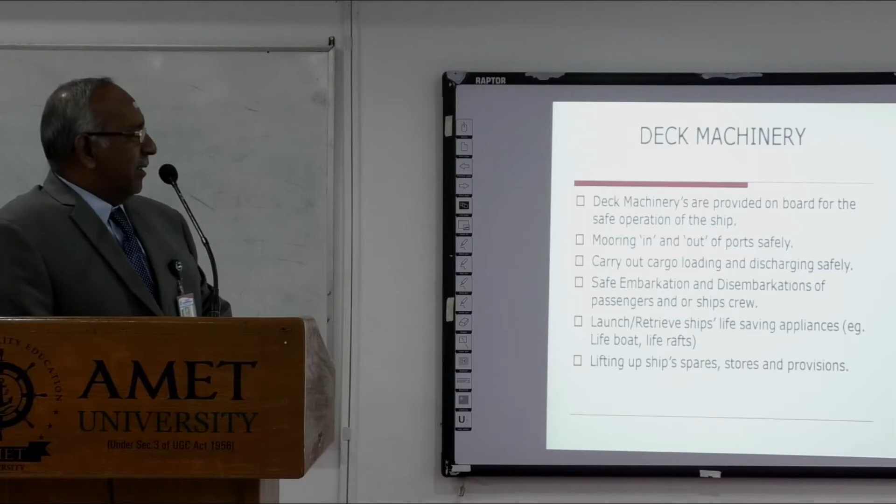Now, today we're going to discuss the deck machinery on the ship. Deck machinery is provided on the ship for the safe operation of the ship. Therefore, there are various machineries. Mooring in and mooring out of ports safely is accomplished with that, carrying out cargo loading and discharging safely, and safe embarkation and disembarkation of passengers and ship's crew.

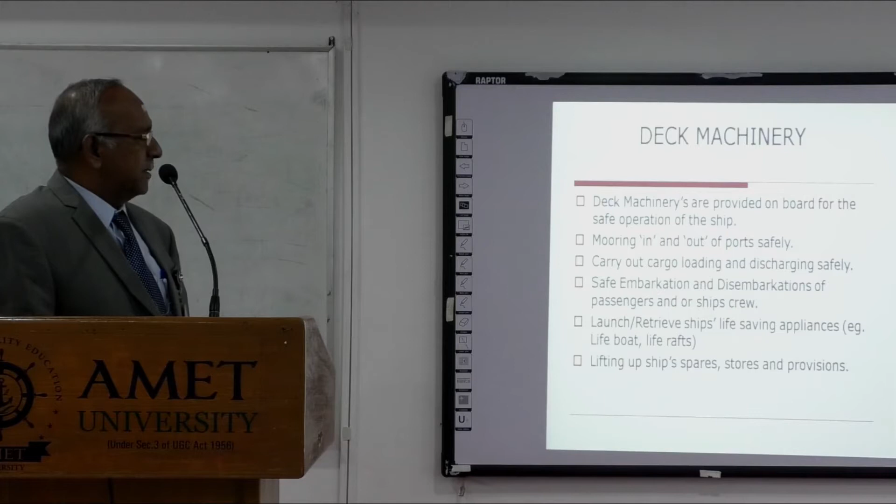Launch and retrieve the ship's life-saving appliances like lifeboats, life rafts, etc. And lifting up the ship's spares, stores, and provisions from the shore. So all these kinds of activities need to be accomplished by the deck machinery. And the deck machinery can be broadly divided into anchor handling, mooring, cargo handling, and lifeboat gear.

Anchor handling consists of the windlass and capstan, and mooring consists of winches and capstans. For cargo handling, we have the winches and the cranes, and the lifeboat gear includes the davits and winches. Now, the forms of power generally used are steam, electrical, hydraulic, and pneumatic for the gangway motors and small lifts.

Steam was widely used on tankers because it doesn't involve any risk of fire or explosion. But the disadvantages of steam were that we need to use lengthy pipes, the maintenance of the steam lines is an additional burden, and fluctuations in the steam load affect the performance of the steam machinery.

Electric motors can be used on general cargo ships and not on tankers, because a single spark on a tanker deck could cause a disastrous result. Therefore, we cannot use electric motors on the tankers on the deck. While electric motors were used in general cargo ships, in the early installations we were using DC, but now AC is found to be better, and it's very prevalently used.

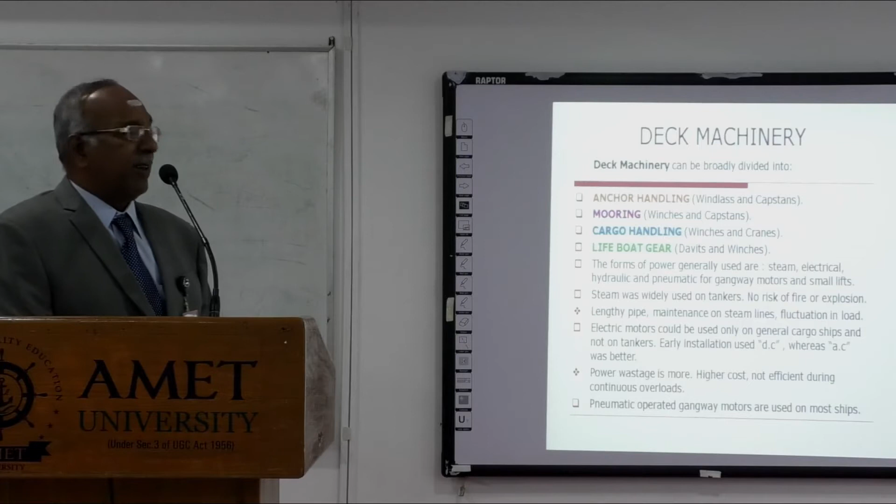Higher power wastage, higher cost, and not maintaining efficiency during continuous overload are some of the problems faced in electric drives. Pneumatically operated gangway motors are used in most ships because a leakage of pneumatic air from the system is not going to be very detrimental, except perhaps the compressor has to run a bit longer. Okay.

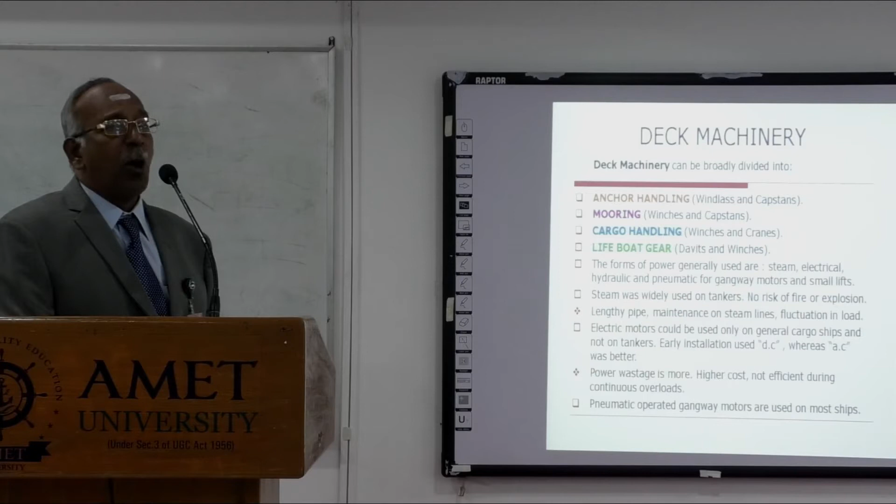Hydraulic systems are used on tankers and cargo ships. The essential components of the hydraulic circuits are hydraulic fluid held in a reservoir or storage tank, a pump to force the liquid through the system, and a motor or cylinder actuator. Now, valves play an important part as they control the liquid flow and pressure. Three basic circuits employ either low, medium, or high pressure oil supply.

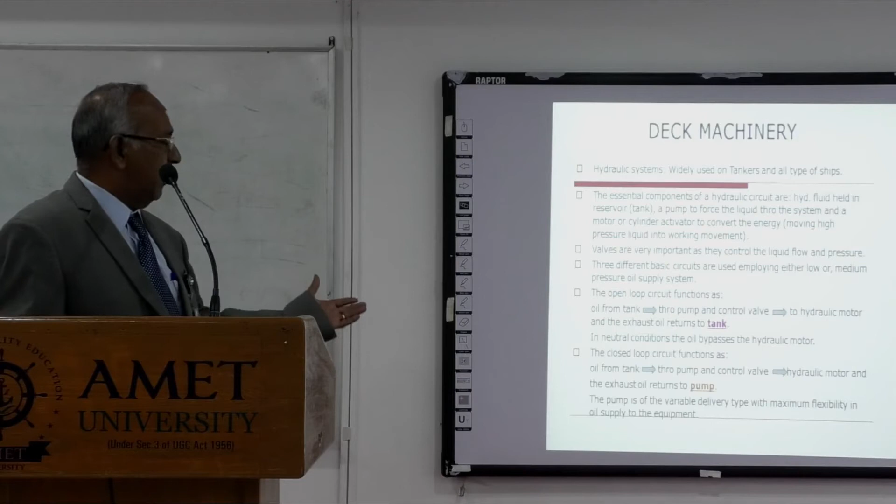The open loop circuit and the closed loop circuit are the two types. In the open loop, oil goes from the tank to the pump, to the control valve, to the hydraulic motor, and the exhaust returns to the tank. In neutral conditions, the oil bypasses the hydraulic motor. In the closed loop, oil goes from the tank through the pump, control valve, and hydraulic motor, and the exhaust oil returns to the pump. This pump is a variable delivery pump with maximum flexibility in oil supply to the equipment.

Now, hydraulic systems are used widely on board. They are grouped into three basic setups. One is the constant flow group. For a constant pump flow, it's possible to vary the flow to a load by varying the outlet from the load. The major components are the fixed delivery pump, unloading valve, and accumulator.

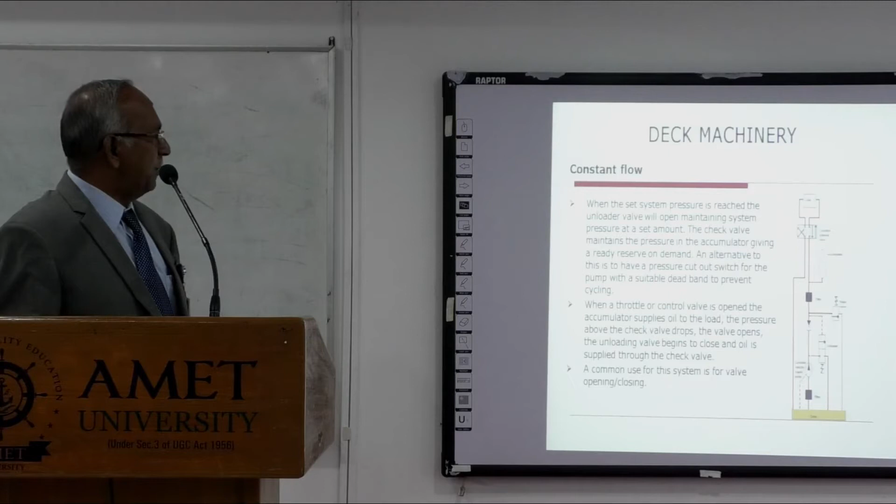The accumulator consists of a steel pressure vessel within which is a rubber bag. The space between the bag and the steel wall is filled with nitrogen at a set pressure. When the constant delivery pump is started, oil is supplied to the accumulator, inflating the bag with oil against the nitrogen pressure. That's about the constant flow system.

In the constant pressure system, we use one or more variable delivery pumps which supply oil at nearly constant pressure. That's why it's called a constant pressure system, to either a system of multiple loads or a single load such as a hydraulic elevator hoist.

When the pumping capacity exceeds load requirements, the system pressure increases above a set value, at which point the pressure compensator acts to take the pump off stroke. A relief valve is fitted in case of malfunction of the compensator.

The constant pressure fluid flow to the load may be controlled by a variety of methods, one of which is a simple 3-position valve as shown in the diagram. This system suits an installation containing several high demand units such as deck winch hydraulics.

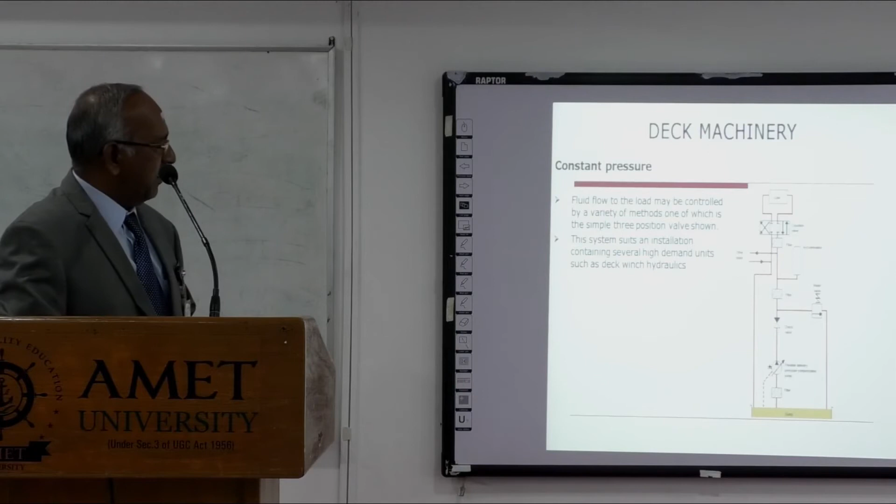Demand system. Again, it's a closed loop system particularly adapted to meet the precise demand of varying loads such as steering gear or automatic weapons handling equipment. The variable and reversible delivery pump does not take suction from a sump tank as the loop of oil is maintained between the main pump and the load.

The closed loop eliminates the pressure drop which would exist if the load control was achieved by a servo valve located in the main hydraulic piping. A servo pump and replenishing pump are driven off the same shaft as the main pump, providing actuating fluid to stroke the main pump and to provide the makeup fluid to the closed loop respectively.

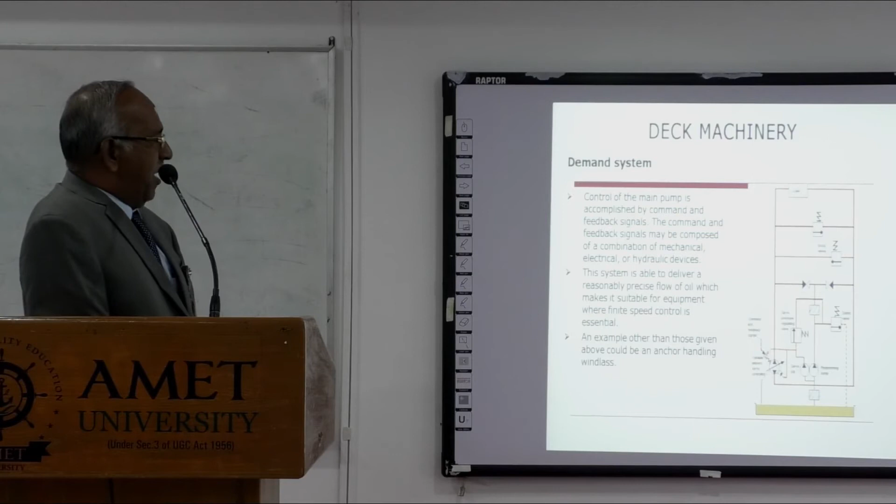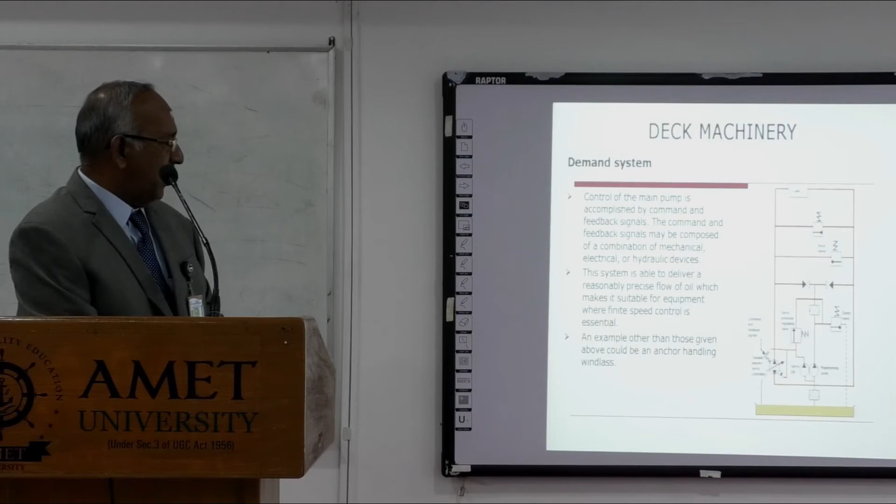Demand system. The control of the main pump is accomplished by command and feedback signals. The command and the feedback signals may be composed of a combination of mechanical, electrical or hydraulic devices. This system is able to deliver a reasonably precise flow of oil, which makes it suitable for equipment where finite speed control is very essential. An example other than those given above could be an anchor handling windlass.

Anchor windlass. The windlass is another anchor handling device wherein a single prime mover is used for warping and winching duties. The rotating unit consists of a cable lifter with shaped snugs to grip the anchor cable, a mooring drum for paying out or letting go of mooring wires, and a warp end for warping duties.

Each of these units may be separately engaged or disengaged by means of a dog clutch, although the warp end is often driven in association with the mooring drum. A spur gear assembly transmits the motor drive to the shaft where the various dog clutches enable power takeoff. Separate band brakes are fitted to hold the cable lifter and the mooring drum when the power is switched off, as shown in the diagram.

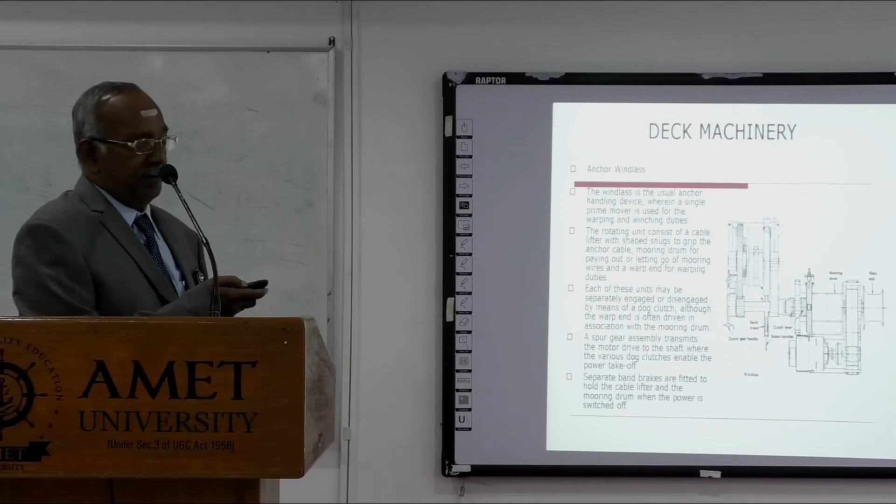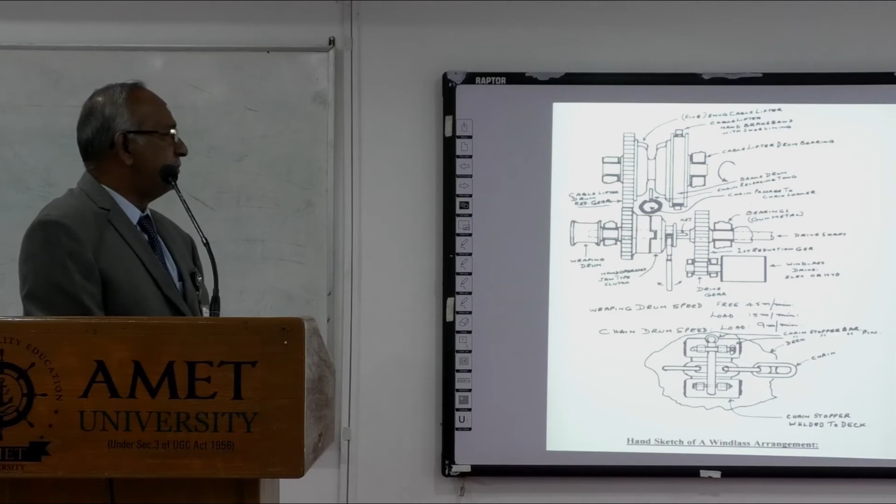Okay, this is a hand sketch of a windlass arrangement. You can see how a cable stopper is used to stop the chain, and these are the various gears working in tandem. The warping drum free speed is about 45 meters per minute, and on load it is about 15 meters per minute. Here are some of the figures of the deck machinery for you to visually see how the deck machinery is arranged on ships.

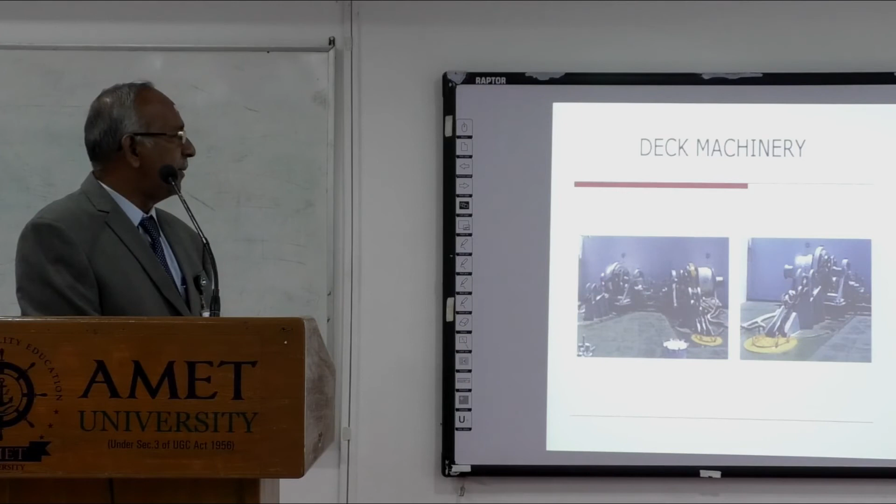Anchor handling. The efficient working of the anchor windlass is essential to the safety of the ship. An anchor windlass can be expected to fulfill the following. The windlass cable lifter brakes must be capable of controlling the running anchor and cable when the cable lifter is disconnected from the gearing when letting go. Average cable speeds vary between 5 to 7 meters per second during this operation.

The windlass will be able to heave a certain weight of cable at a specified speed. This full load duty of the windlass varies, maybe as high as about 70 tons; 20 to 40 tons are not unusual. Generally, the load is between 4 to 6 times the weight of the anchor. The speed of haul is at least 9 meters per minute up to 15 meters per minute.

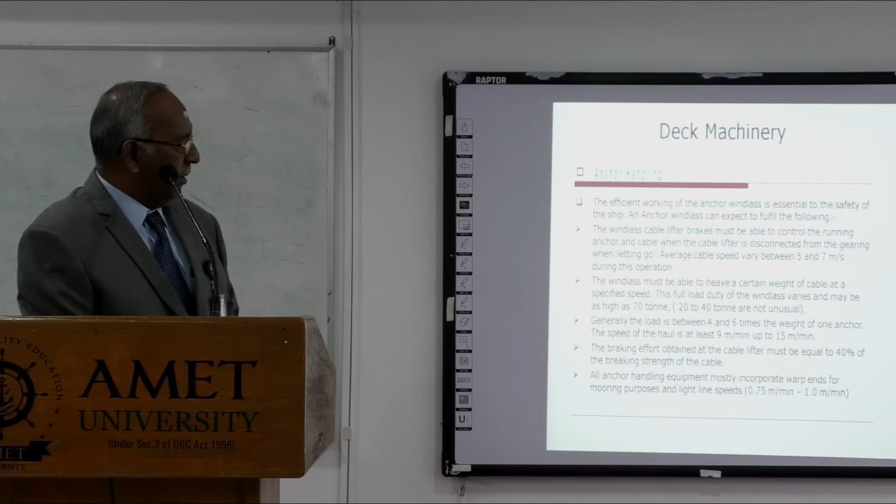The braking effort obtained at the cable lifter must be equal to 40% of the breaking strength of the cable. All anchor handling equipment mostly incorporates warp ends for mooring purposes and light line speeds between 0.75 meters per minute to 1 meter per minute.

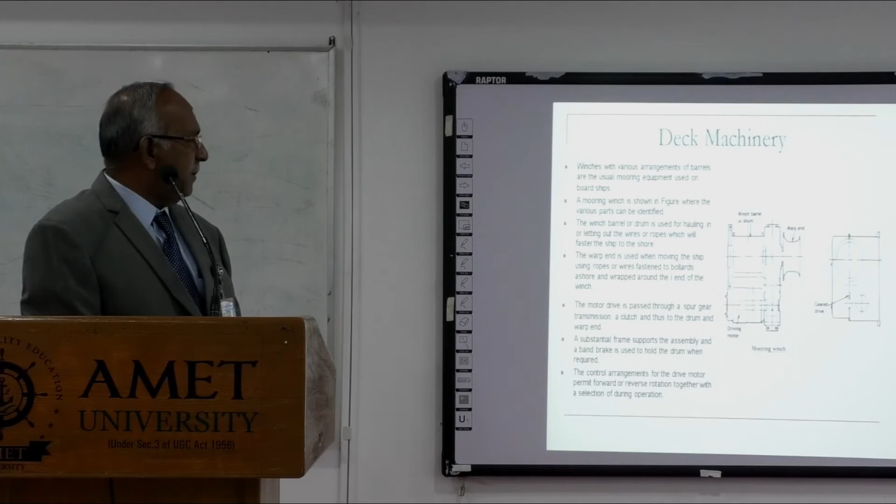Winches with various arrangements of barrels are the usual mooring equipment on board ships. The mooring winch is shown in the figure, where the various parts can easily be identified. The winch barrel or drum is used for hauling in or letting out the wires or ropes which will fasten the ship to the shore. The warp end is used when moving the ship, using ropes or wires fastened to bollards ashore and wrapped around the end of the winch.

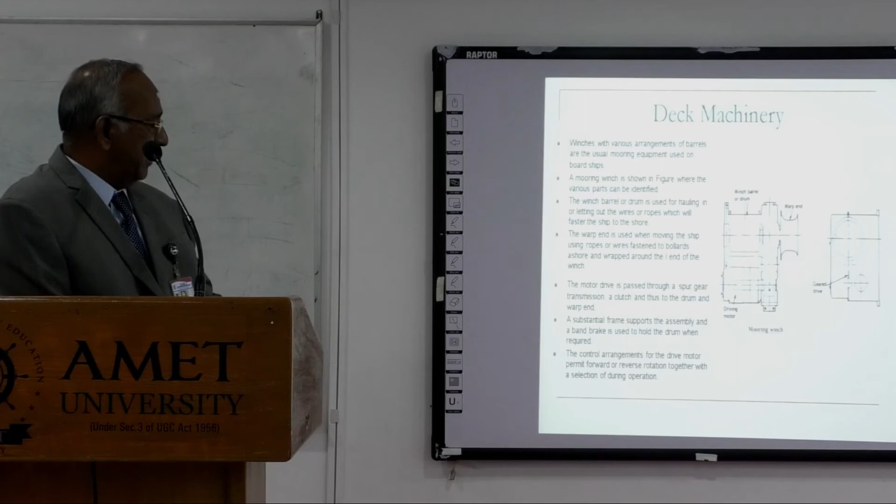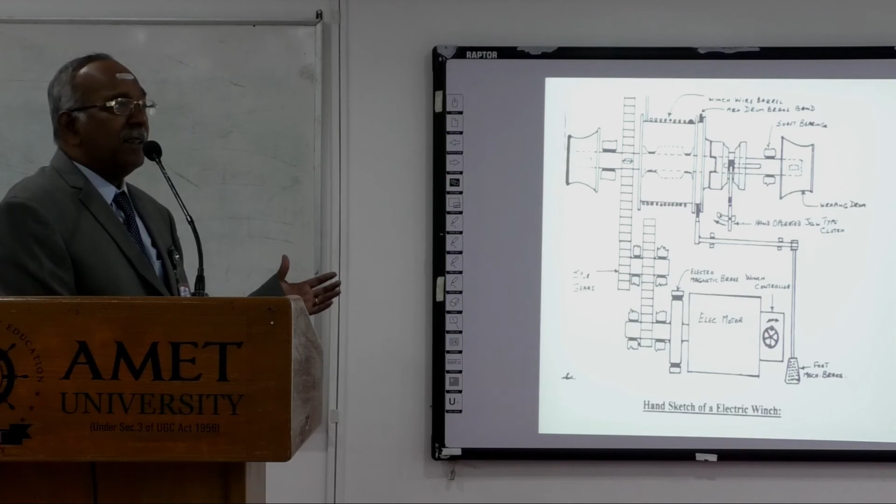The motor drive is passed through a spur gear transmission, a clutch, and thus to the drum and the warp end. A substantial frame supports the assembly, and the band brake is used to hold the drum when required. The control arrangements for the drive motor permit forward or reverse rotation together with speed selection during operation. So this is the hand sketch of the electric winch.

The next equipment is the capstan. The capstan is used primarily for warping: the act of changing the vessel's position with respect to a wharf, pier or other ship by manipulation of a common line attached to both objects. A modern capstan suitable for continuous hauling is shown in the figure.

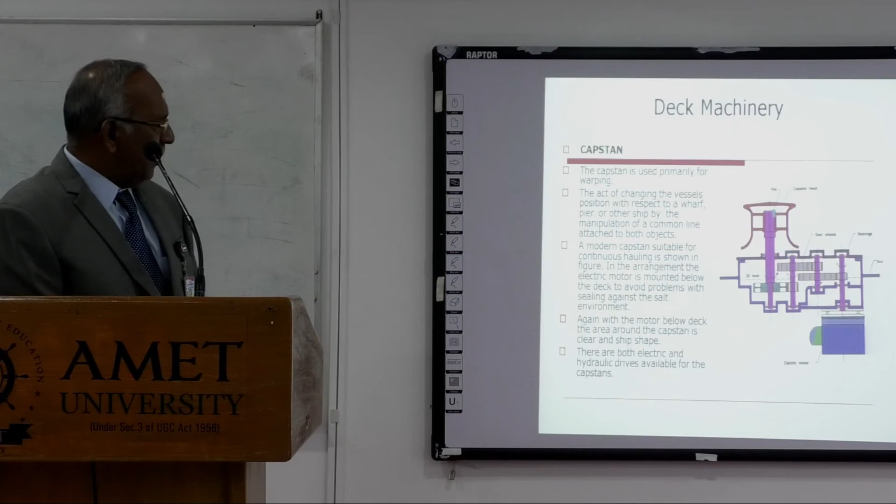In the arrangement, the electric motor is mounted below the deck to avoid problems with sealing against the saltwater environment. Again, with the motor below deck, the area around the capstan is clear and ship-shape. There are both electric and hydraulic drives available for the capstan.

Now we come to the cargo handling or revenue earning equipment. They mainly consist of the heavy deck rigs, the derricks, which handle the cargo loading and unloading operations. The basic operation is to load the cargo from the shore to the ship or discharge from ship to shore. Loading and discharging of cargo were carried out by heavy derricks or by conventional methods.

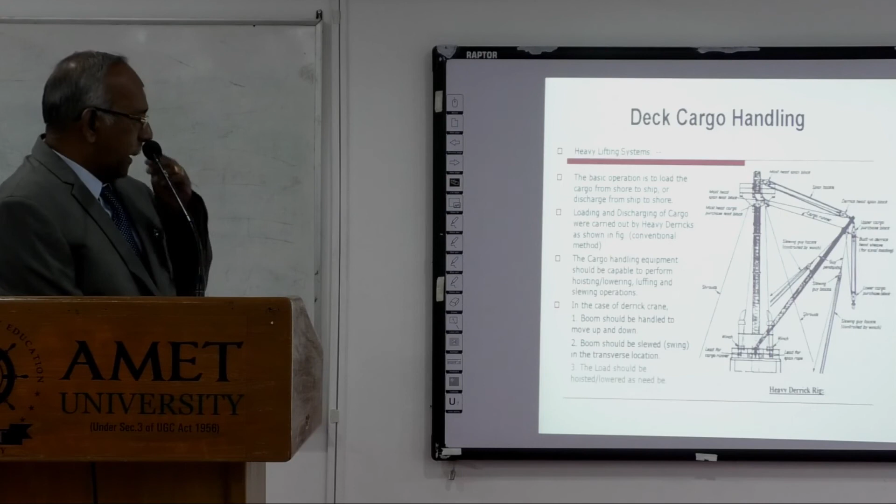Cargo handling equipment should be capable of performing hoisting, lowering, luffing, and slewing operations. In the case of a derrick crane, the boom should be able to move up and down. The boom shall be slewed or swung in the transverse direction. The load should be hoisted or lowered as need may be.

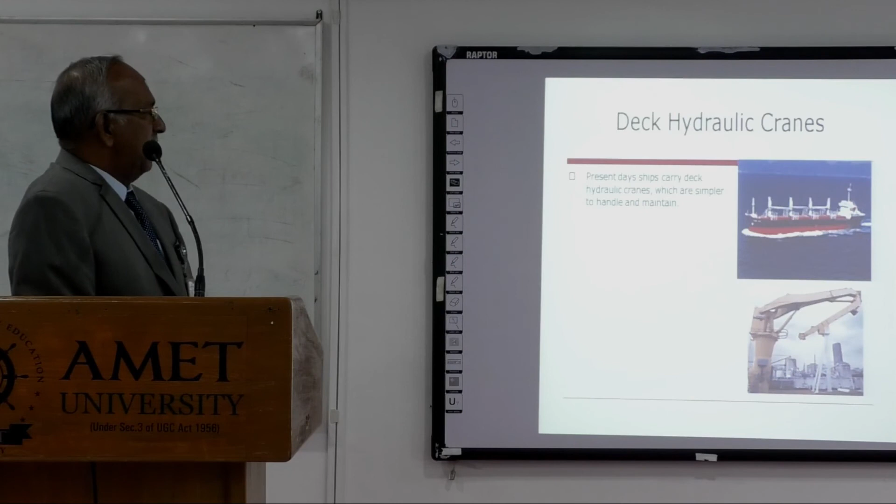Hydraulic deck crane pictures are shown for better understanding. Present day ships carry deck hydraulic cranes, which are simpler to handle and maintain. These are some of the different types of deck hydraulic cranes which are now prevalent on most cargo ships around the world.

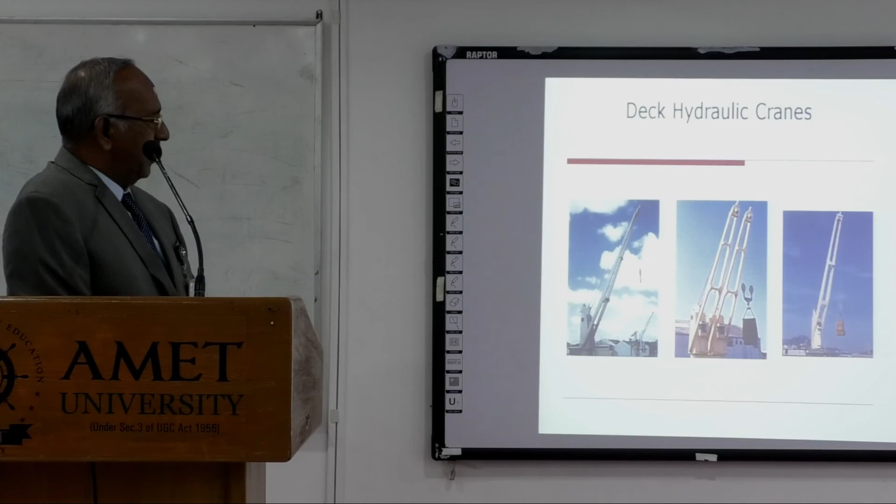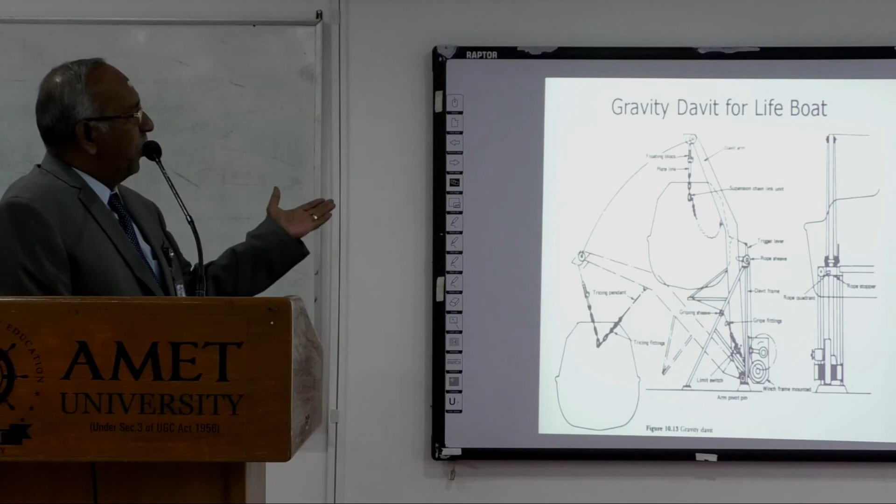Now we come to the life-saving appliances handling equipment. We have the gravity davit for the lifeboat. As you can see, the lifeboat needs to be swung out, lowered to allow people to board, and then lowered or hoisted. All the duties and the housing of the lifeboat are on the gravity davit cradle.

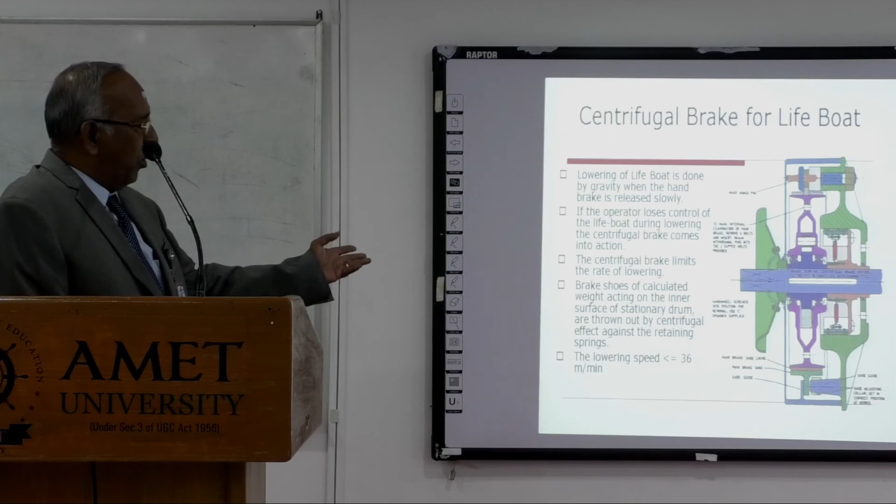Centrifugal brake for the lifeboat. Lowering of the boat is done by gravity. When the handbrake is slowly released, we take advantage of gravity to lower the boat with its weight. If the operator loses control of the boat during lowering, the centrifugal brake comes into action. The centrifugal brake limits the rate of lowering. Brake shoes of calculated weight acting on the inner surface of the stationary drum are thrown out by centrifugal effect against the retaining spring. The lowering speed is normally not more than 36 meters per minute.

So, we have come to the end of the presentation. So far, we have seen the various deck machineries which are commonly and very widely used. And we also saw the various kinds of duties that are required to be performed, right from when a vessel reaches a port, probably anchoring and staying put in sheltered waters for a limited time, then heaving up the anchor, approaching the port, approaching the berth, the mooring, unmooring

and warping operations, and after that, when the hatches are opened up, how the cargo can be handled, either commercial cargo or the ship's own cargo like stores and requirements to be picked up from the shore. And we also saw some of the deck machinery which helps you handle the launching or heaving of life-saving appliances like a lifeboat.